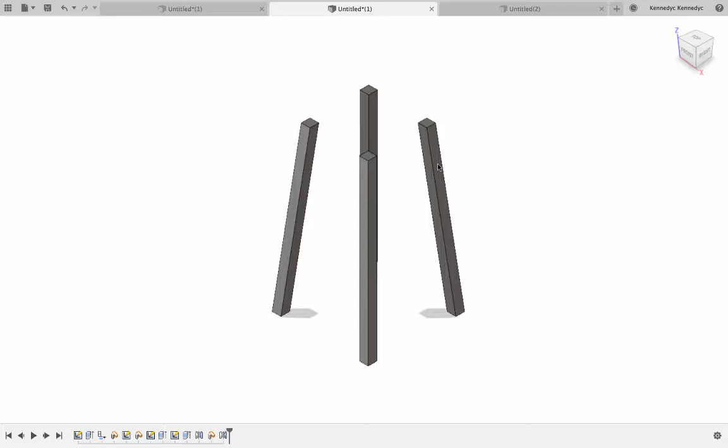This is a brief explanation of how to make a stool, or the legs for a stool, which are angled in, both from the front orientation and also from the right hand side. There's plenty of ways that you should be able to do this. This is one that I've found. It's not the easiest one, or the most straightforward one, but it is a little bit of a workaround for it.

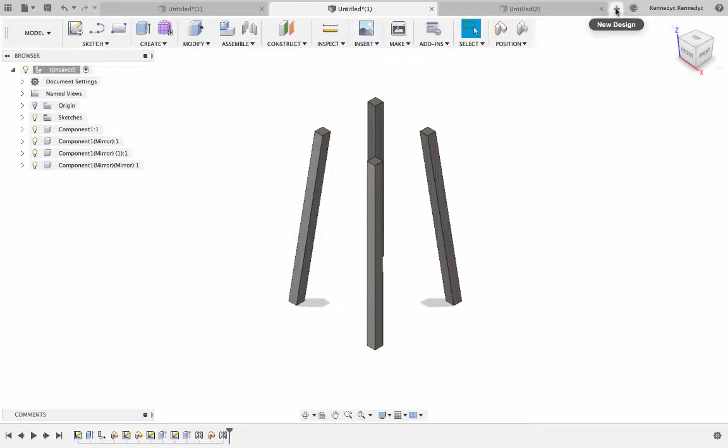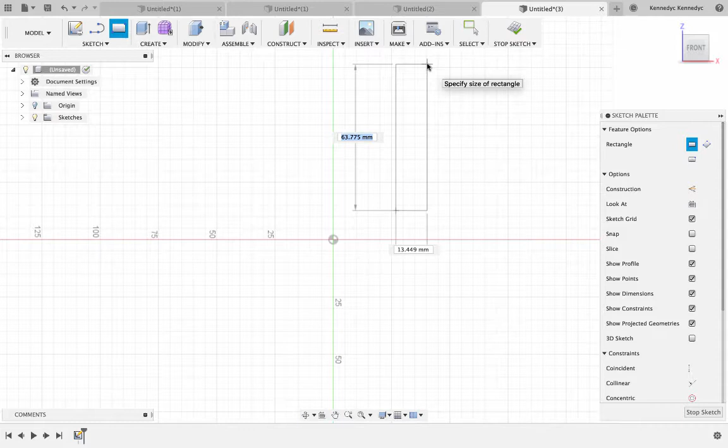So if we open up a new document and click on the front plane there, I'm going to draw a leg, and I want it to be inside this area here, not too close to it. I want the leg to start up here in this little quadrant, and it's going to be 580 by 30 to begin with.

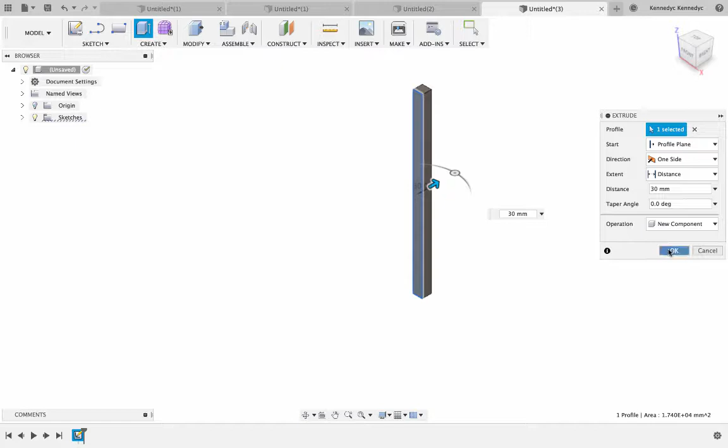Click OK, stop sketch, and there's the front profile. We can then go and extrude this 30 millimeters, so it's a 30 by 30 leg, and we're going to call this a new component. Again, with our naming conventions, it's a good thing to come over to the component and give it a meaningful name.

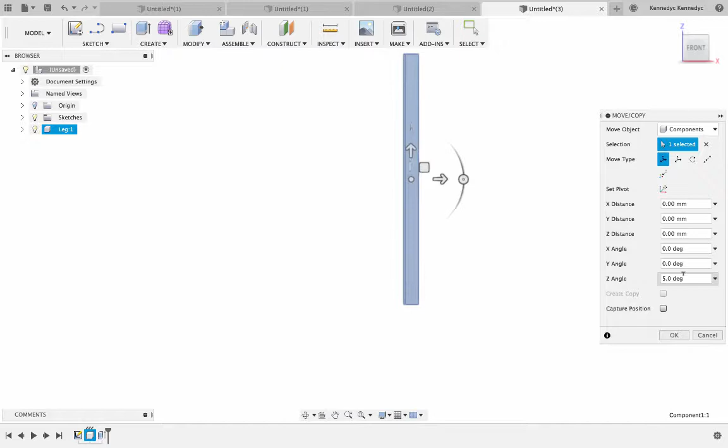And then from that front orientation, we're going to modify and move this, and I would like to put it on a 5-degree angle. Now, I'm not sure which axis we're working in there, we'll have to just play around. It's not that one, as you can see. It's that one there. And if you put it in the negative, it would tilt the other way.

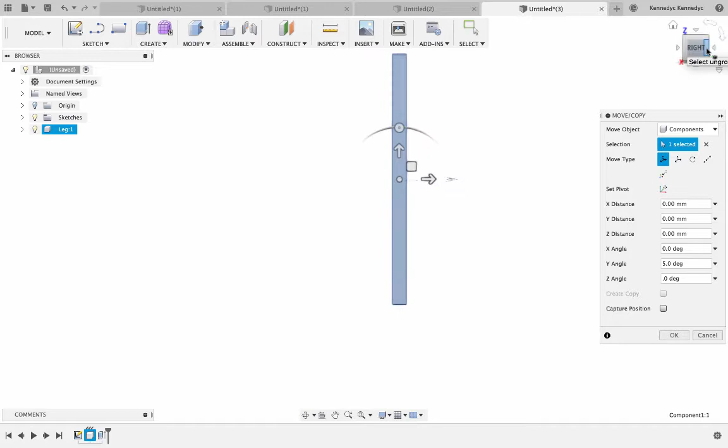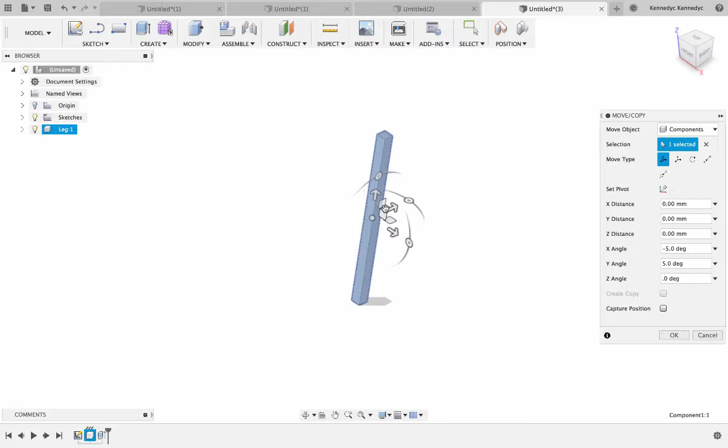So let's start off by tilting it away from that working plane that we drew it in, in that quadrant there. I'm going to move over to the right hand view before clicking OK, and I'm going to move it in that direction as well. And again, let's move it away from the working plane. And when we look at it, you can see it's slanting in from the front and also from the right hand side there.

Click OK. And what we'll now need to do is, if you go to the front view there and you imagine putting a top on there to sit on, the top is going to be slightly angled and it's not going to sit flat on there. So we just need to shave that down so that it's parallel with the floor.

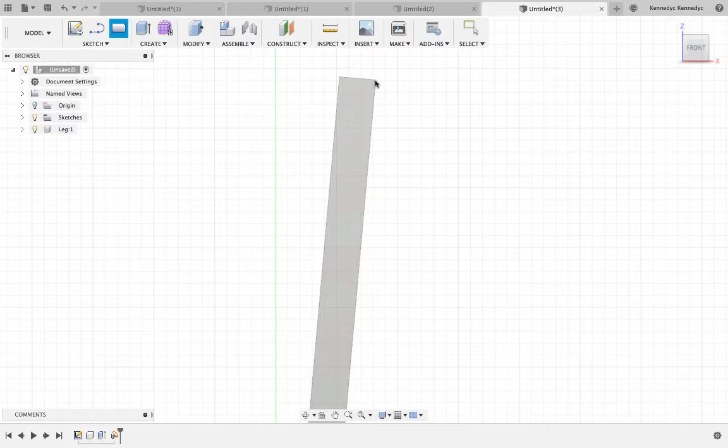The way that we'll do that is to create a rectangle. Make sure that we capture the position here. We don't want that leg to return to that straight position, so capture position. It's asking me which plane I want to work in. We'll work in that front plane there, and then just move up to the top here and zoom in a little bit.

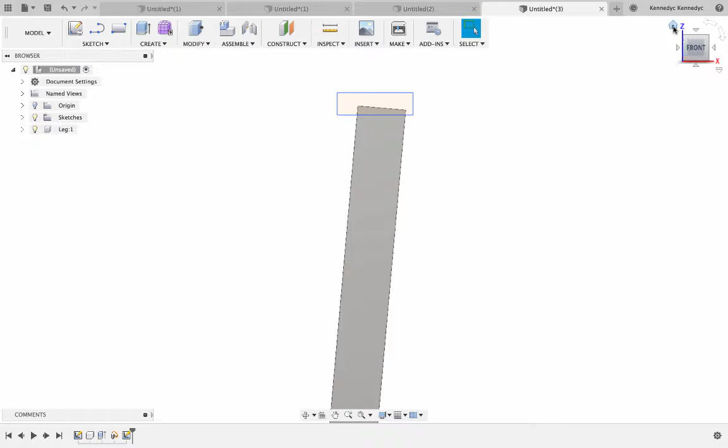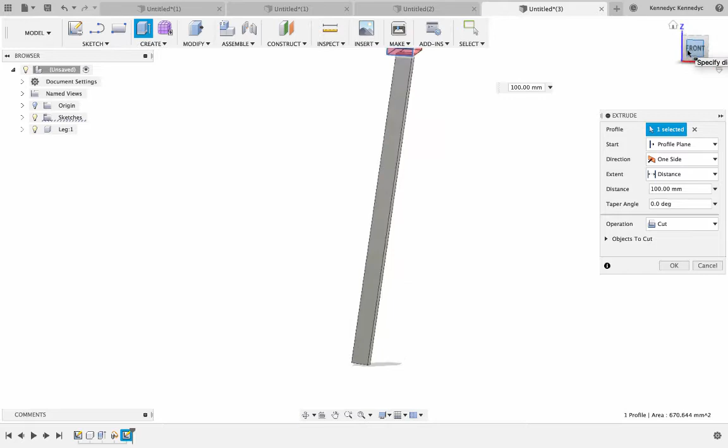Just starting a little bit below that corner there, we're going to draw a little bit of a rectangle and stop the sketch. Now what we'll actually do with this is extrude it, and rather than creating a solid shape, notice the operation here is not join like two solid objects or create a new body, it's actually to cut through that. So when I click OK, anything that shape passes through, it will remove the material. You can see it's made that top flat.

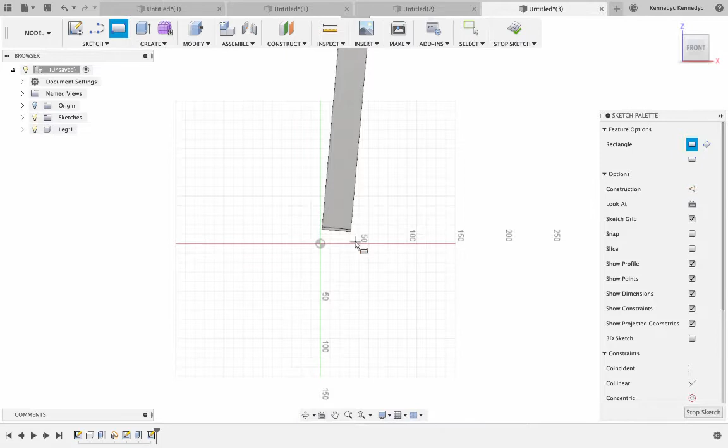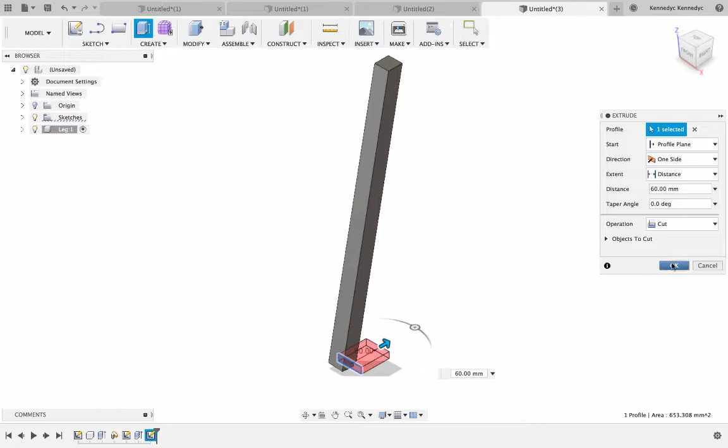We can then do the same to the bottom. So again, we take a rectangle, click in that front plane there, and just a little bit below that corner, and bring the box out around it. Stop sketch. Again, we'll go to our extrusion and bring that through. Click OK. Now notice what's happened there is it started in the middle of it, which is not great.

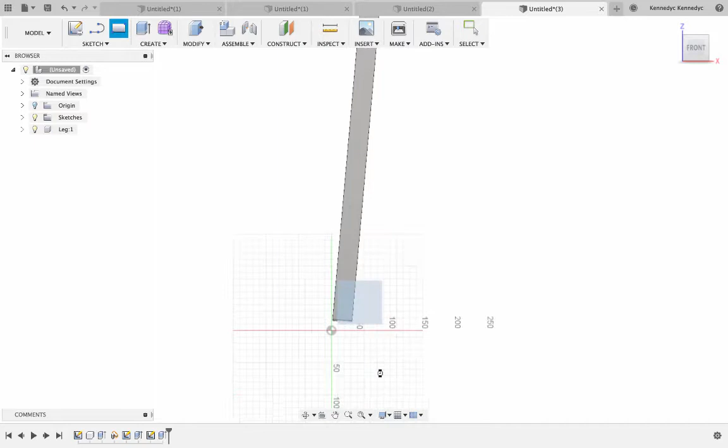So I'm just going to go and do one more. We'll say create a rectangle in the front plane. We'll put that same thing in there. Click stop, and this time E for extrude, and we're going to go back that way. It's not ideal doing it in 2 stages, but as you can see, if we click in the right view, flat bottom, and if we look from the front view, flat bottom, flat top on both of those.

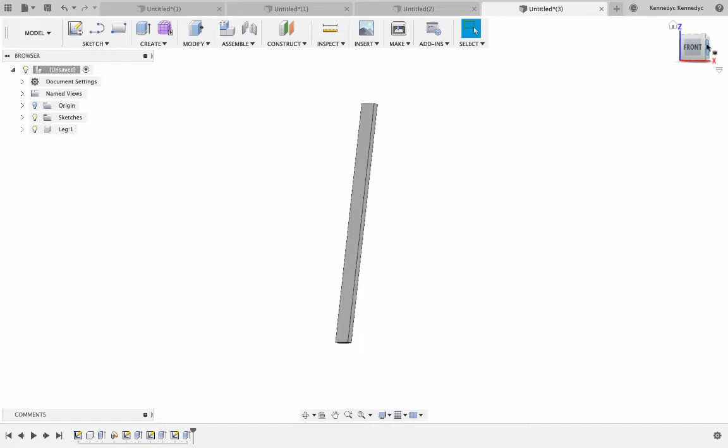So there's our leg done. Now we've got 1 of them. We need 4 of them. So I'm going to now go to my top view here. Actually, I'll stay in the isometric view, that home button, and we're going to create a mirror.

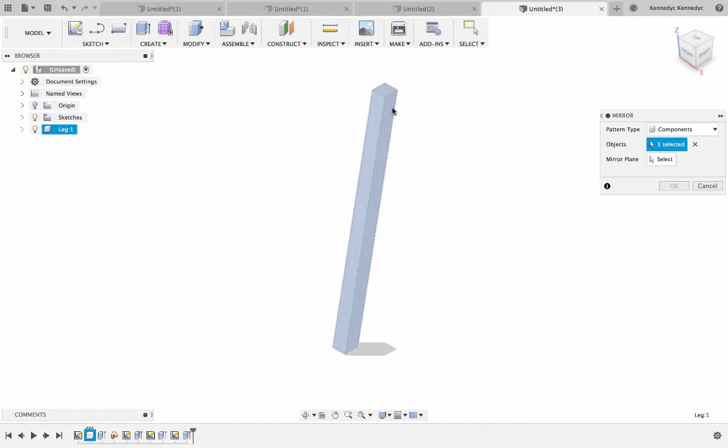Let's select a component. It's going to be this one here, and then mirror plane. We want to select this one here, and that's created another leg. Now it's on the wrong side. We want this over the other side. So I can click OK now, go to my top view, and I just need to move it now.

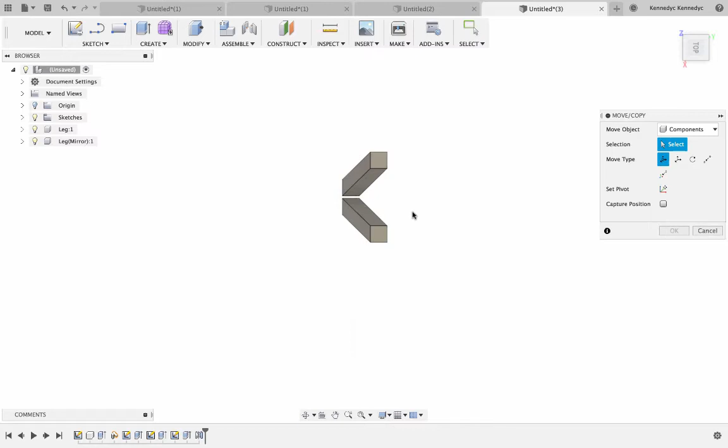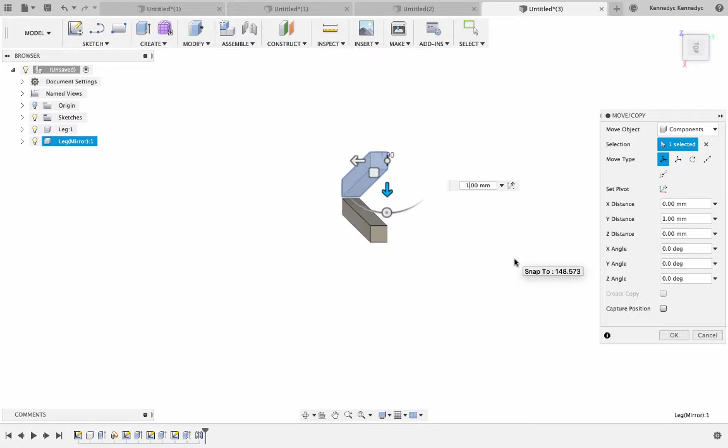So if I go to modify, move, and click into that one there, I can drag that along so that they will roughly line up. I can move that into position there until it lines up. Just play around with those dimensions until those 2 squares line up. It looks like it there.

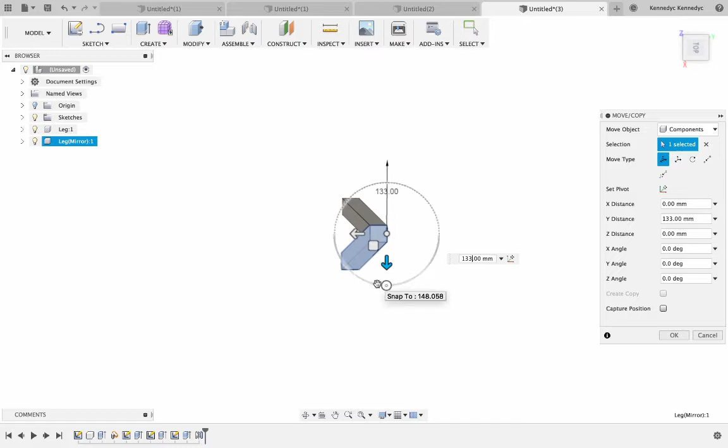And then what you'll need to do is work out how far apart do you want these legs at the top. So the distance between the legs up the top, what does that want to be? So for example, let's say we had a rail in there that was 200 millimeters separating them. We're going to put in there plus 200 millimeters and click OK.

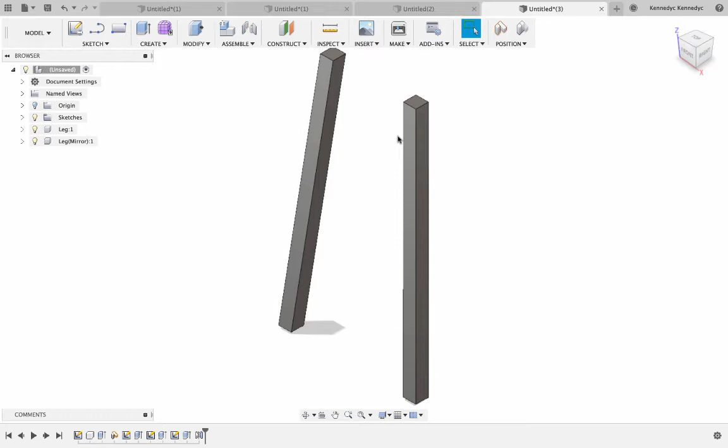Return to home, and we just need 2 more now. So again, we're going to mirror them. So create a mirror, capture position, click on both of those, and then select the mirror plane again. This time it's going to be this one, and again, it hasn't turned out exactly the way that we want it, so we're just going to move those.

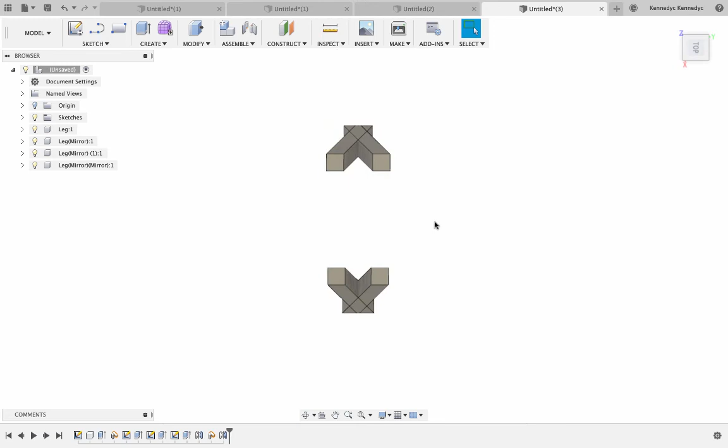Go into the top again, modify, move, click into both of those components, and then on that arrow there we can drag that across roughly in position. See, it's moving in 25 millimeter increments. I guess if we zoom in on that, the increments become less, and there we go. We can actually get that into position there.

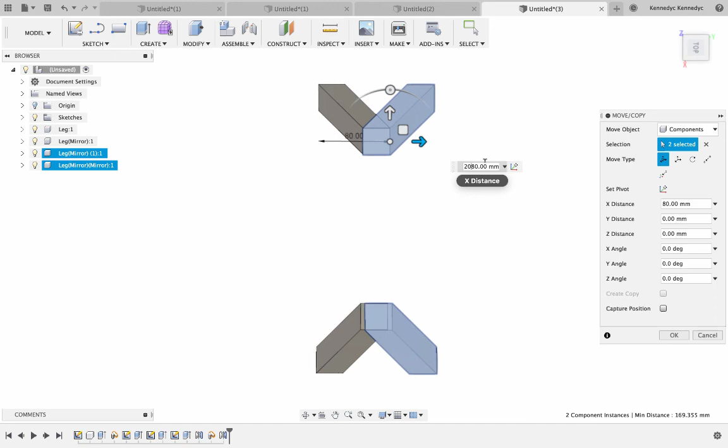And we're going to again add 200 millimeters. 200 plus 80. Okay. And they should all now be evenly spaced.